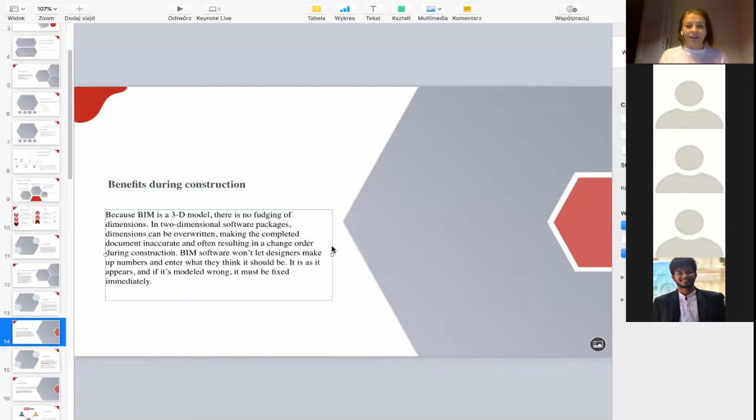From one side, it can sound like it takes more work, and we should focus very well on this 3D model, and it will take time. But mostly people are afraid in the beginning when they don't really know the software they are designing in, but later it's very easy, it's a very quick and fast way to design in this BIM idea, because everything is in 3D and we can really design nicely, and everything is connected with every specialist - construction, architects - and it's much faster to work like that.

And we can't really forget about this whole idea of BIM - it's something like working on the project. It's not finished with the end of our project.

This project made in BIM is very welcome to have something like that for managers of this building which we are designing, because when we just create some interior design for an apartment, and later, 5 years later, something breaks in the house, even the owner of the house can, in a very quick way, check: okay, this broke, I should find in this website, I should look for some replacement on this website, this manufacturer, this model of this element.

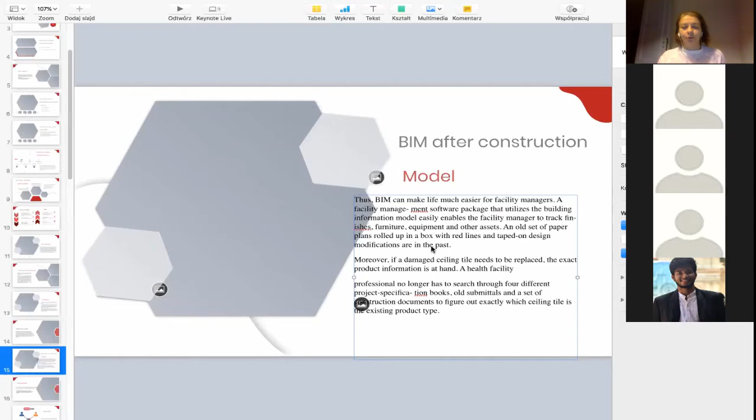When we are designing a hotel, it's absolutely amazing that we have such a project, because later the manager of this hotel can very quickly get all information: where and when we should make an appointment for our service, when we should check our lamps, or any other information in the project. Later it's very easy to make renovations or add services in the house, hotel, or restaurant we just designed.

The main term is IFC, and we should really do this because it's very important, since everybody is scared about software and afraid they won't be able to work. Everyone is working on AutoCAD, ArchiCAD, or Vectorworks, and we should work together, but we don't want to change our software.

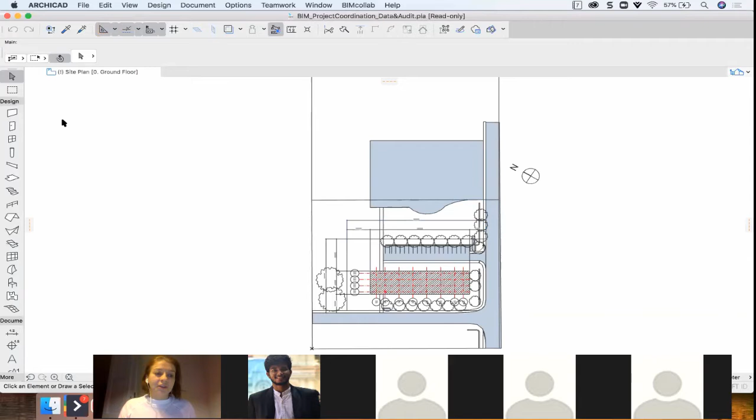We don't need to change our software. We can keep working in whatever we've been designing in until now, even in the future, because we are exchanging this as an ArchiCAD IFC model, and IFC can be exported from every kind of software we design in. This is very important, especially for interior designers, because we like to forget about this—we're just caring about our project and not thinking about anything else.

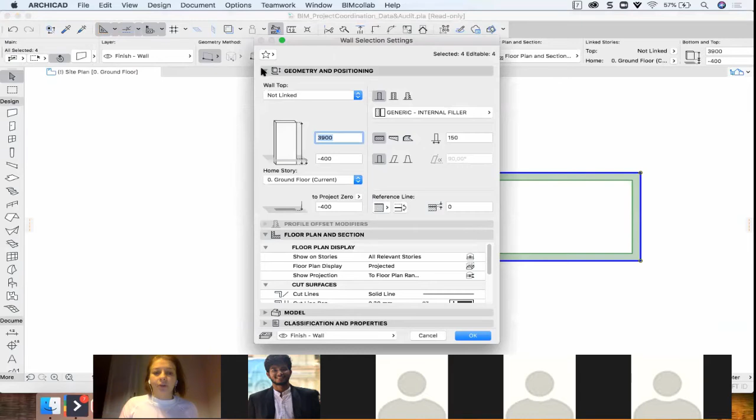When we place something in the program, no matter what it is, you always need to check if you're working on different software. For sure, you can check something like the information window of our project—there will be something like classification, and we need to properly set all this information for every element we put in our project, to set the right classification.

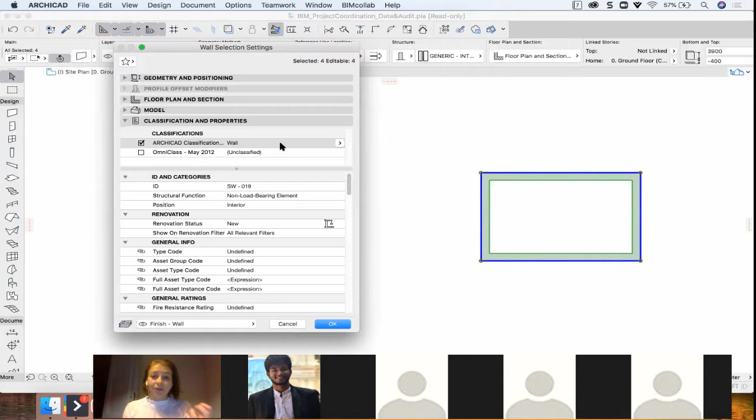So if it's a wall, I should set that it is a wall, not, say, a chair or something else. Because later, if the plumbing engineer tells us he needs to see where the walls are in this IFC model, and we don't click that tick in the file, don't select the wall, and don't set the classification, and we export such a model—the plumbing engineer will open this file and say, hello, but there are no walls. How am I supposed to work on this file? And this is the most important part.

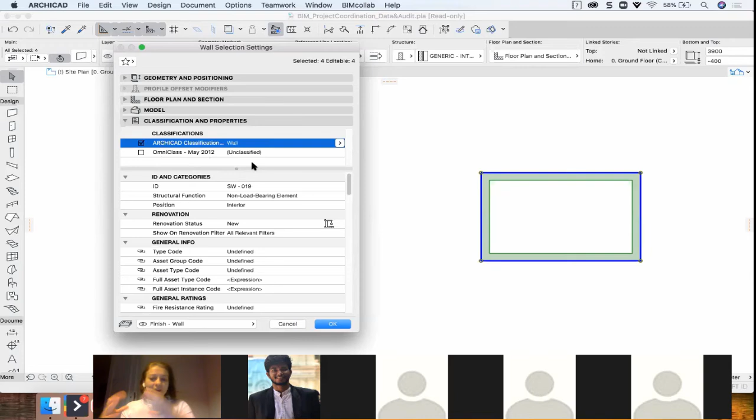I think if we know our software well, we can create a great interior design project, but we're not thinking that we need to collaborate. That's why it's so important that every element in your software has the right classification.

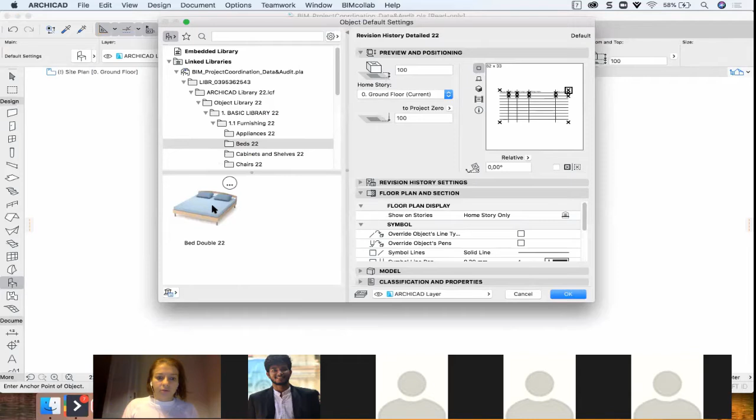We can also set properties—we can create many more properties. Here are some general ones in ArchiCAD, but we can set as many properties as we wish. For example, if I have some furniture, let's say a bed, I can set in the properties as much information as I wish.

You can see that it's not classification, but it doesn't need to be—our furniture doesn't need classification. It's nice if we set every element in our project with the right classification, but to be honest, our specialists—plumbing engineer, electrical engineer, and everyone else working with us on this project—don't really need to know where our beds are. It's not information for them.

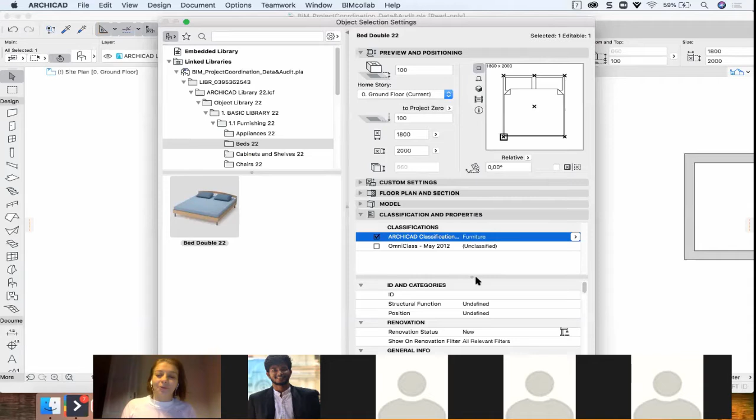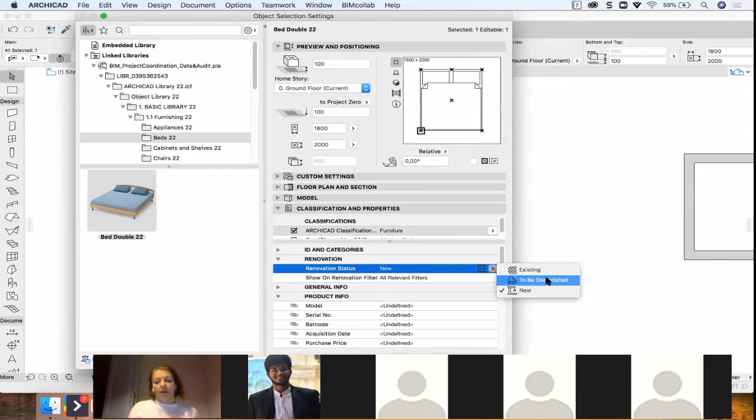It's quite important for the electrical engineer to know where the lamps should be, but it's nice that every element has the proper classification set in the right way. In ArchiCAD we also have something like renovation status, so we can set that this wall, okay, exists now, but for example we would like to place another wall, and this wall will be a new one.

IFC, right? How you can share the data and information from one software tool to another software tool, right?

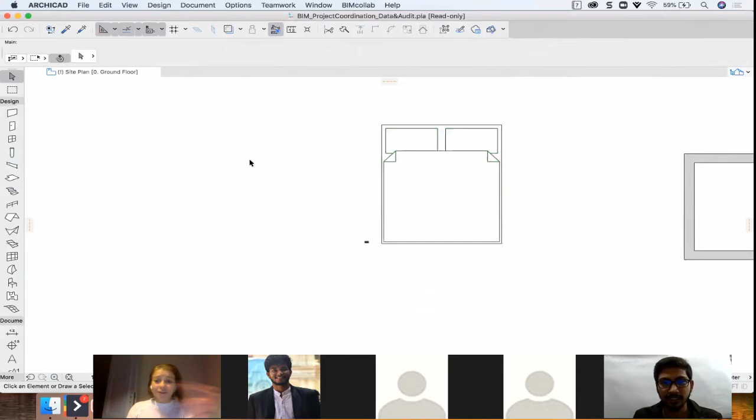So one more thing, because my screen is too small, I think. Okay, so when you set all this information, you just need to export—not save as, just go first, before you export, go to translators, IFC translators. But in ArchiCAD, when we're working with ArchiCAD classification, we don't really need to go here, because it's already proper—something like a wall from ArchiCAD will be exported as a wall, it will be exported like this. So when we save such a file later, save as IFC. Absolutely.

This IFC file, the plumbing or electric engineer, we import to his project or some extra software. He can see this model, but he can't really make any change in this file. This is quite important, because sometimes we get some file he updated, and there are some mistakes - the plumbing engineer moved it on our plan, but it didn't move on his project.

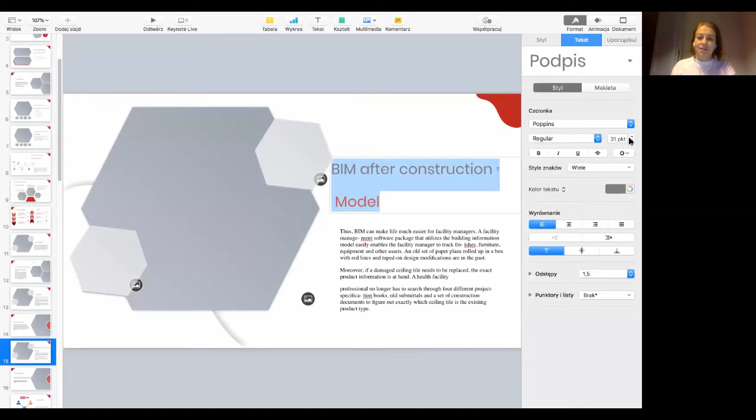But mostly people are afraid in the beginning when they don't really know the software well where they are designing. Later it's very easy, very quick, very fast - we can design in this BIM idea, because everything is in 3D and we can really design nicely, and everything is connected with every specialist, construction, architects, and it's much more faster to work like that.

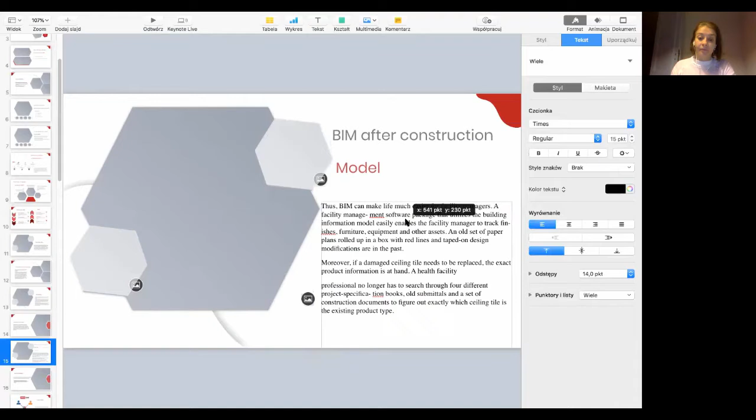And we can't really forget about this whole idea of BIM.

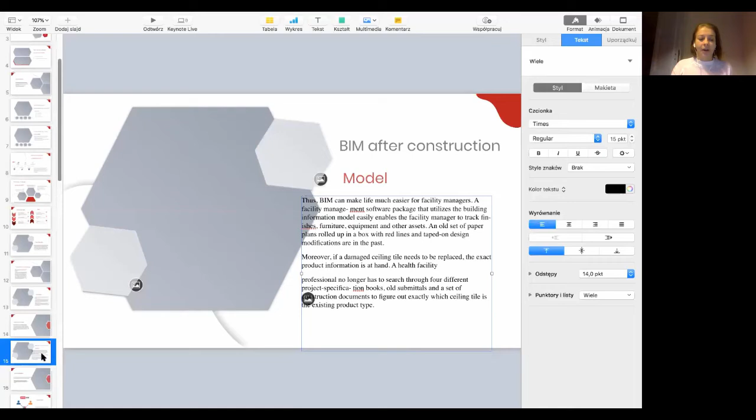Time is running, I could talk and talk about this. This is why IFC is so important, because everybody is scared about software, that they will not be able to work.

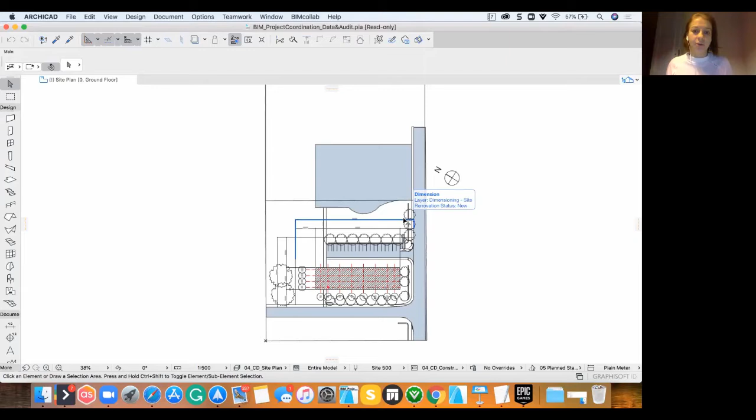I will just share my screen. Everyone is afraid because if you're working on AutoCAD, ArchiCAD, or Vectorworks, you think we should work together but don't want to change our software. We don't need to change our software. We can keep designing with what we use now, even in the future, because we are exchanging this as an ArchiCAD IFC model, and IFC can be exported from every kind of software we design with.

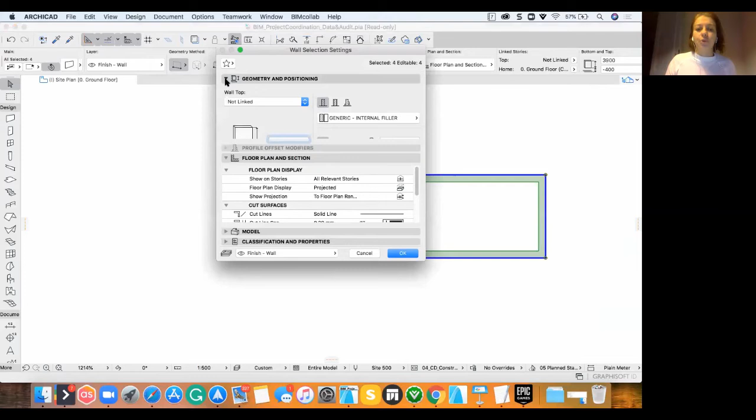This is very important, especially for interior designers, because we like to forget about this. We just care about our project and don't think about anything else. But no matter what you place in the program, you need to check things if you are working on different software. You can check something like the window of information of our project.

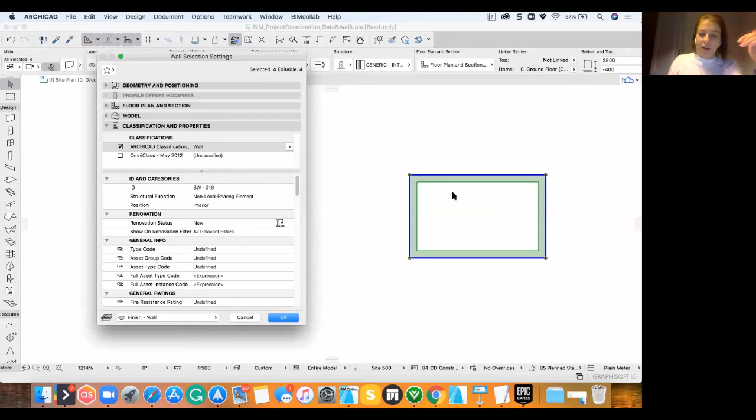There will be something like classification, and we need to properly set this information for every element we put in our project, to set the right classification. So if it's a wall, I should set that it is a wall, not something else. Because later, if the plumbing engineer tells us he needs to see where the walls are in this IFC model, and we haven't clicked that tick in the file, haven't selected the wall and set the classification, when we export such a model the plumbing engineer will open the file and say hello, there are no walls here, how am I supposed to work on this file?

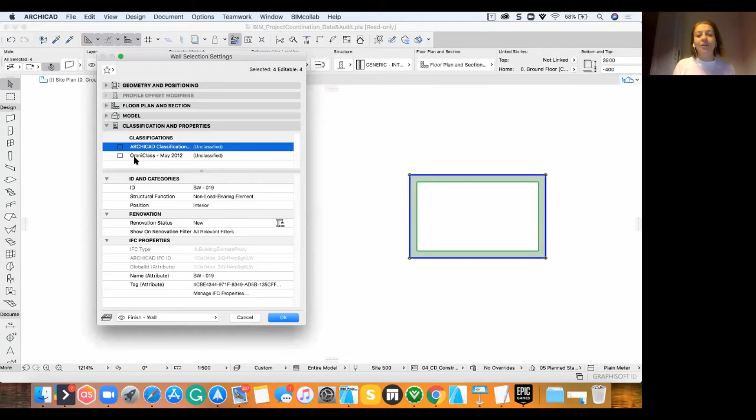This is the most important thing. I think if we know our software well, we can create a great interior design project, but we're not thinking that we need to collaborate. That's why it's so important that every element in your software has the right classification.

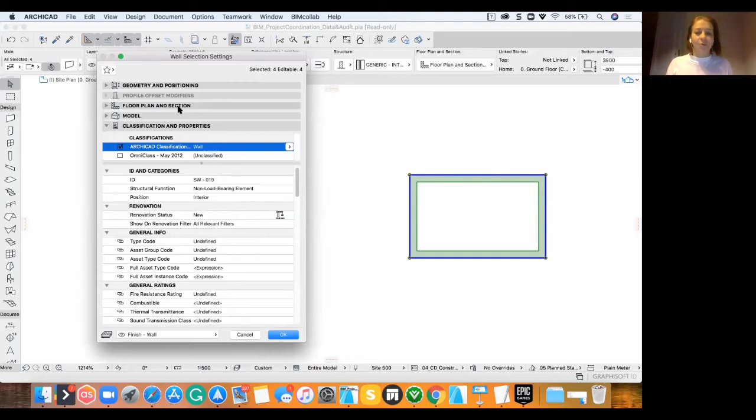We can also set properties, and create as many properties as we wish. Here are some general ones in ArchiCAD, but we can set as many properties as we want. For example, if I have some furniture, let's say a bed, I can set in the properties as much information as I wish. You can see this isn't classification, but it doesn't need to be. Our furniture doesn't need classification.

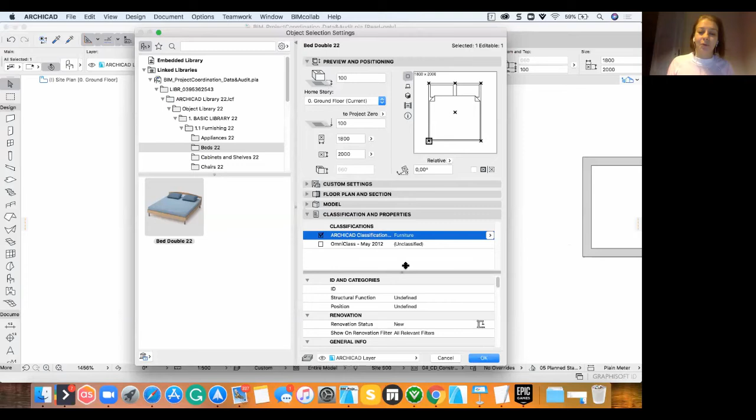It's nice if we set every element in our project with the right classification, but to be honest, our specialists, the plumbing engineer, electrician, and everybody working with us on this project, don't really need to know where our beds are in the project. That's not information for them. It's quite important for the electrical engineer to know where the lamps should be, but it's nice to have every element with proper classification set in the right way.

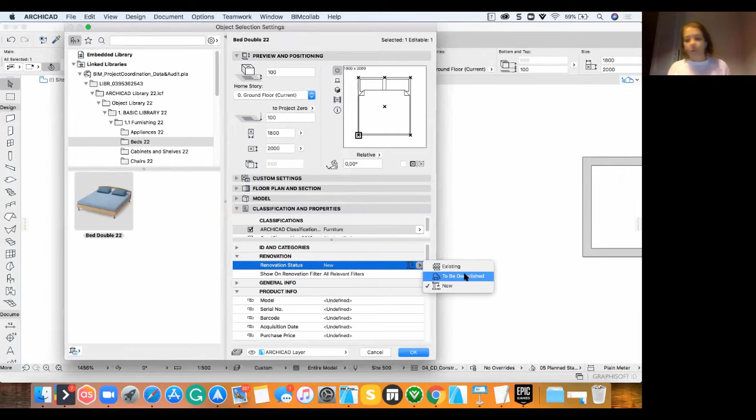In ArchiCAD we also have something like renovation, where we can set that this wall exists now, but for example we'd like to place another wall, and this wall will be new. Yeah, I'm almost finished, I think.

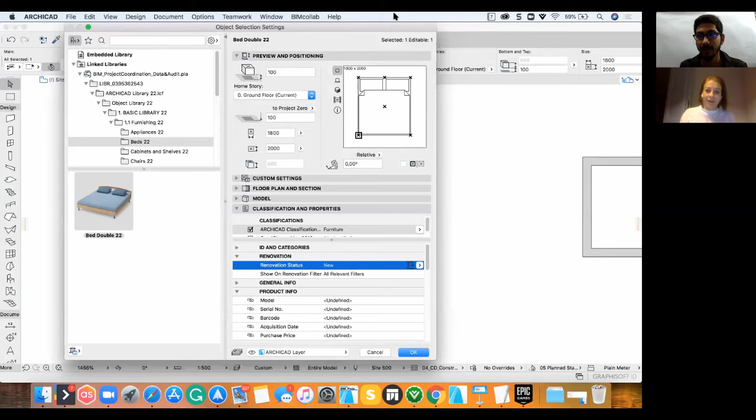IFC, right? How you can share the data and the information from one software tool to another software tool. When you set this all information, you just need to export, not save as.

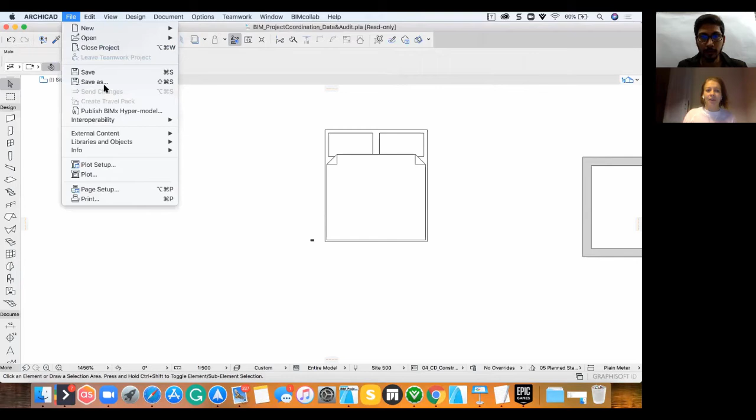Go before you export, to translators, IFC translators. But if in ArchiCAD we are working with the ArchiCAD classification, we don't really need to go here because everything is done in a proper way, so something like wall from ArchiCAD will be exported as wall. So when we save such file later, save as IFC, and it can be exported to any of the tools.

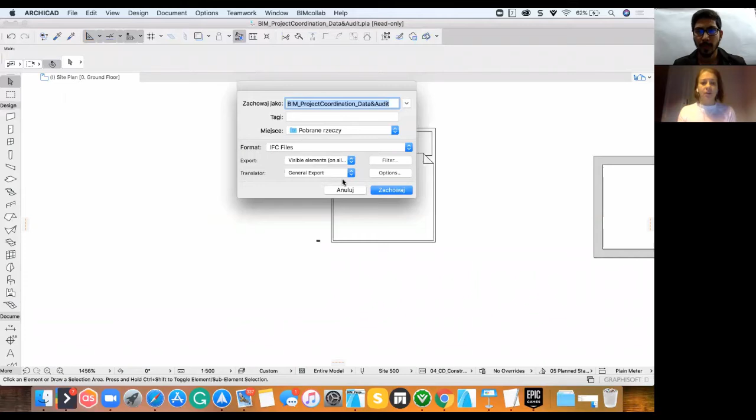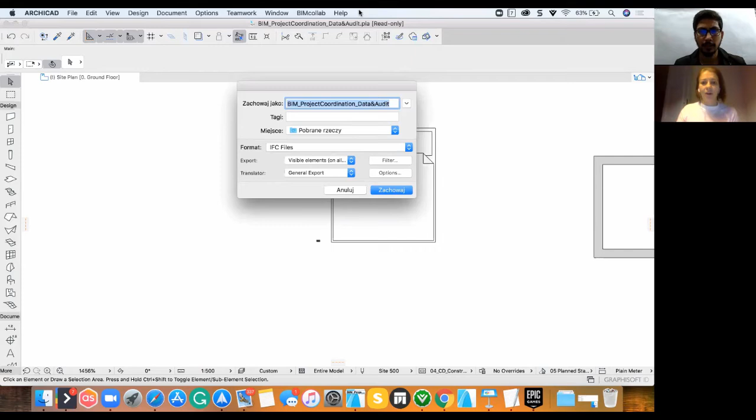So here we finished, we save this file. This is what I said, for example we get some project from architect, this full model where the exterior walls, roof, slabs, this information we need to start our interior design project. But there are some interior walls inside, and if we would like to demolish one of them, we can't. We need to send information to the architect that we would like to demolish this wall. He needs to do this in his model and send us the file again. So we can open the IFC file, but we can't make any changes in it. I think this is quite important.

I have a question for you, Beata. Like most people in the West, in the European countries, they are using and adopting ArchiCAD, right? It's Revit. I think Revit is even more popular than ArchiCAD. SketchUp for interior design, I'm telling you how interior design is, SketchUp is quite popular for interior designers as well.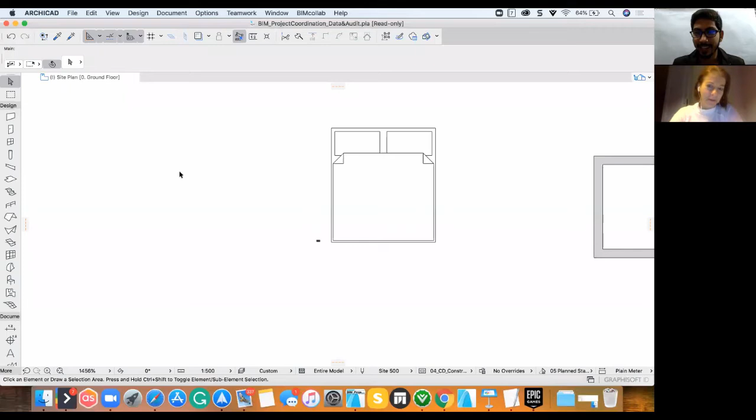And SketchUp also works in the BIM process, because not everybody knows it's BIM ready. So if we talk about SketchUp and ArchiCAD, ArchiCAD stores the information, whereas SketchUp doesn't store the information, right? So how can it be involved in the BIM workflows? I don't know SketchUp well, but if they are BIM ready, all elements should also have some information. SketchUp works a little differently because in ArchiCAD we work with real walls, doors, objects, lamps etc. But in SketchUp we just work with something like a morph. But for sure if they're BIM ready, they should know how to make this classification, because it's everything about classification, that we need to set.

So how do we collaborate with different stakeholders? Like from Autodesk we have BIM 360 for cloud collaboration. Do we have any such platform with ArchiCAD as well? Yes, there is, for example, let me just click it. BIMcollab, for example, it's something open where we can just share and work together on the project.

But this is when we are from different disciplines, we can't have one software when we are collaborating. And BIMcollab, as I know, is free up to 5 users, if I remember right.

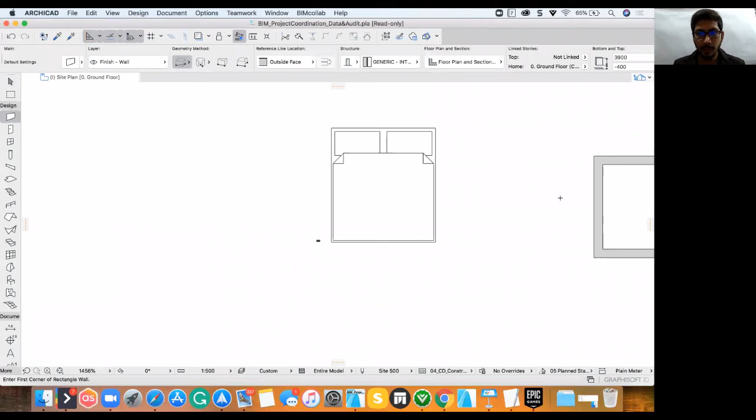Finish into the wall, right. For example, we have some wall here, and we have an option in the model when we are creating it, where we decide what kind of finish this wall should have. Mostly we are doing something in this way.

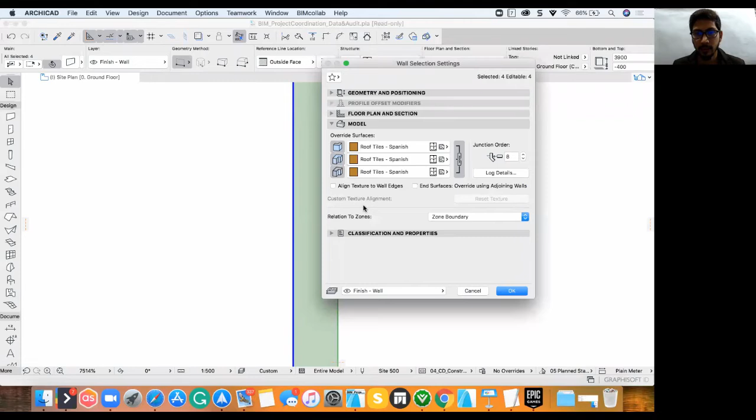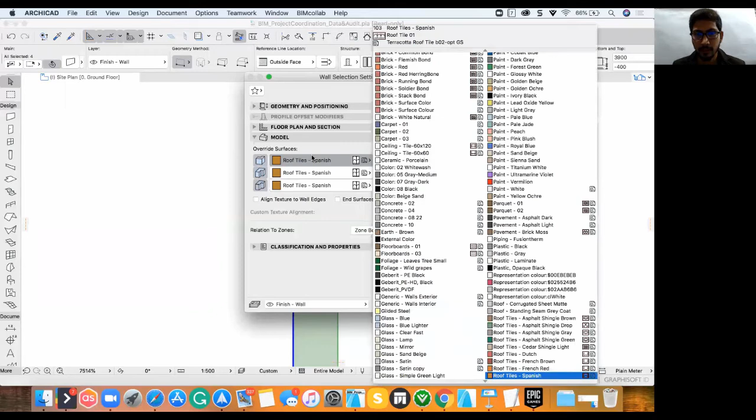There was a specific question about glass or a fabric panel. First you set it in the model, for example if it's the wall, it will be in the model. But if you would like to place something new, at the beginning you need to create this material in the software, and it will be available here.

So if we have some glass, for example there are some glasses in this project, even more glasses. But if you haven't such glass now, you need to go to options, elements, attributes, surfaces, and create this material there. If you create this material here, it will be available later in this model.

Yeah, I think she has answered your question. So Beata, can you tell me, when we talk about taking out the material quantity, is it also possible to take out the material quantities from ArchiCAD directly?

Material quantity from the ArchiCAD directly? I'm sorry, I don't understand your question. Yeah, I think he also has the same question. That person needs to quantify the number of glass panels on a wall. Is it possible?

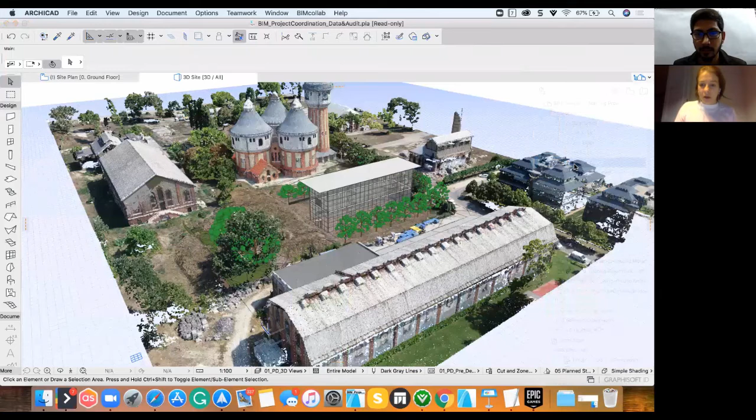I'm trying to imagine in what way we would like to set this glass. But should the glass be on all the wall or just on one element? On one element, on one side or one face of the wall.

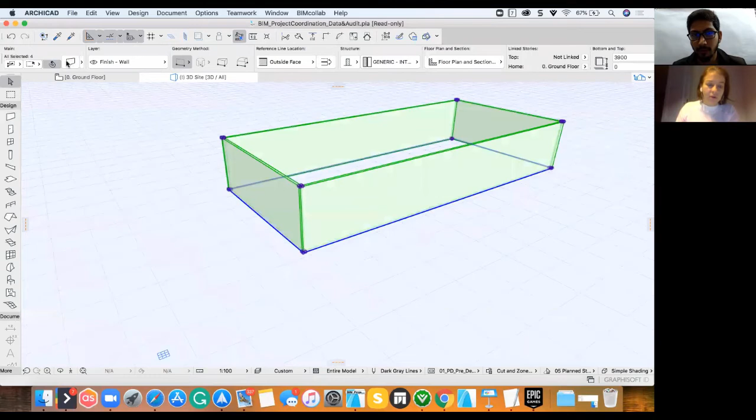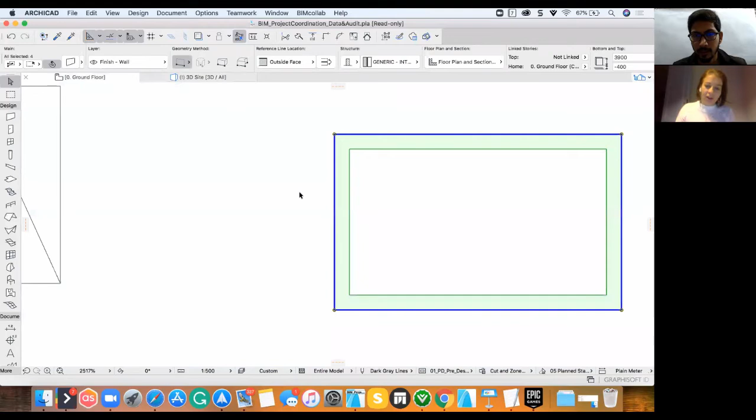It's more difficult if you would like to have, say, 2 meters of glass and later it will be white. If you set something like that, it's more difficult because a wall is always full wall. Before creating something, it would be wasting of time if we create 5 meters glass and later different materials. I have 2 pieces of wall and I can set the glass on one piece, but it's wasting of time because especially at the beginning you can change your mind about what kind of surfaces it can be.

ArchiCAD has a tool called split. We just select this wall, click on split, and you can cut this wall wherever you would like. Now from one wall I can have 2 pieces of wall, and I can change the materials of one for something else, and another we have something else.

There are also options to really know exactly where to split, where to cut this wall, in which dimension, what elements. We need to set the palette, control box.

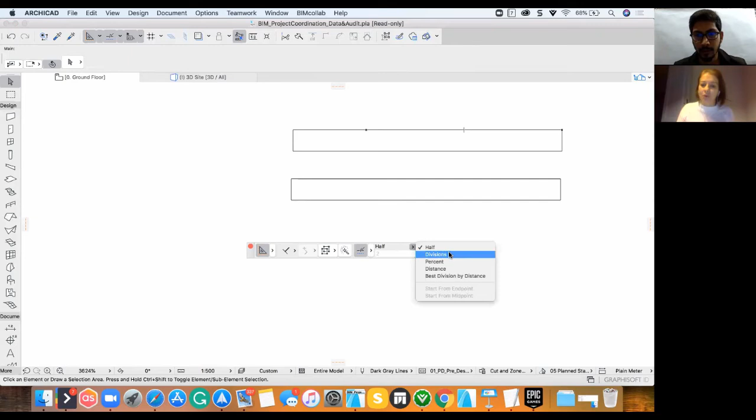Wait, here is something like a special point. Wherever you are going, you can see a short line - that's the special point. We can set, for example, that the special point should be exactly where I would like to cut the wall and make 1 meter this material, 1 meter this, 1 meter this, so 1000 millimeters.

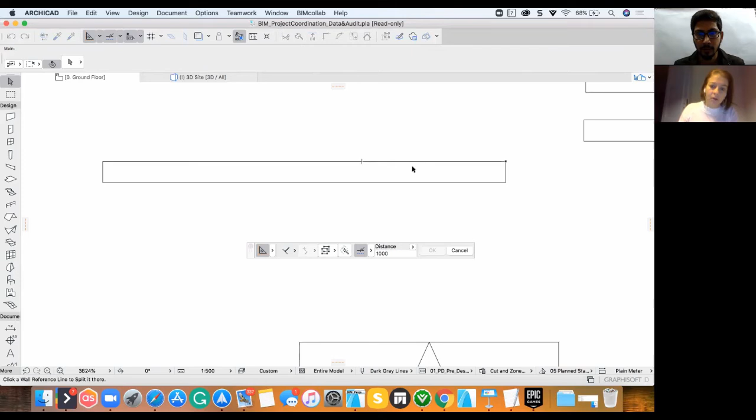So let's set some wall. Now I'm just taking this, you can see I have a line here and one line here. Click on this point and I have 2 elements. Again, split. Click on this point and we have 3 different sections, exactly 1 meter, 1 meter. This one will be a little bit short, but I start cutting from this direction, 1 meter, 1 meter. On the plan it looks correct, it's one wall, but I can select and change materials to something different.

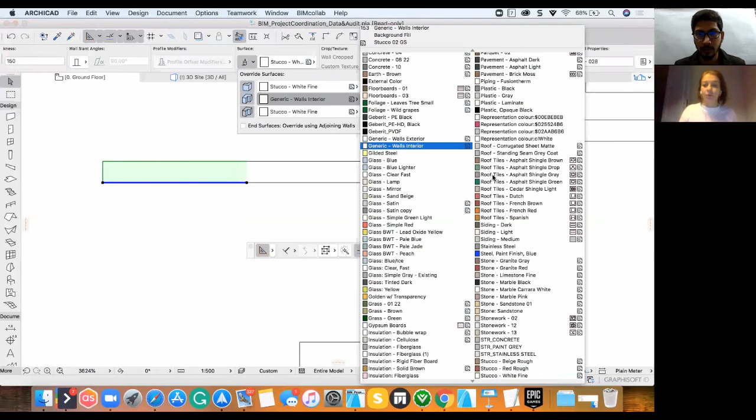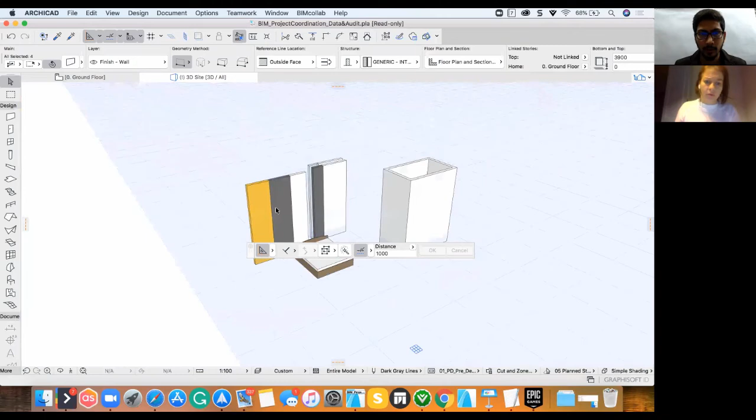Not here. Here, something like, it's in this way. Right. The problem is that the split doesn't work in this direction - you can't really place materials like that horizontally.

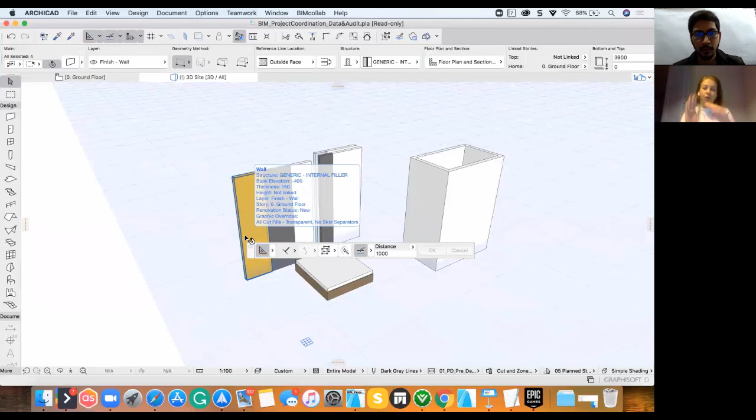So you need to set a wall on the wall, or place some small wall or morph on this wall in the right direction. Got it.

Can you also show some of your projects which you have, Beata? I think it's a point cloud model, right? Yes, you can also import if you have one.

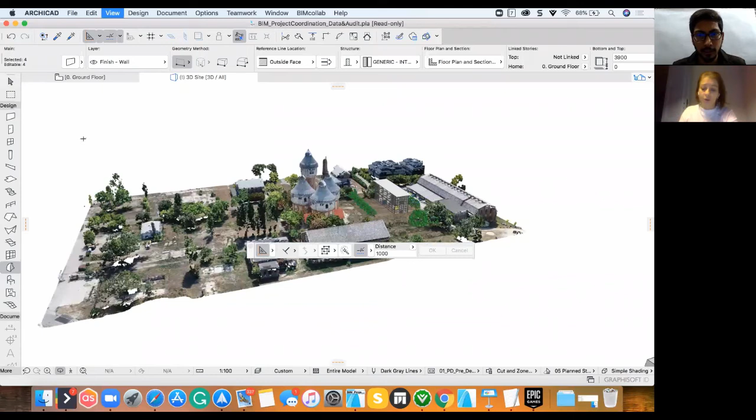It's more popular, maybe not so much popular yet, but it started to be popular to make point cloud. You can also make interior point cloud and import this. ArchiCAD itself imports point cloud.

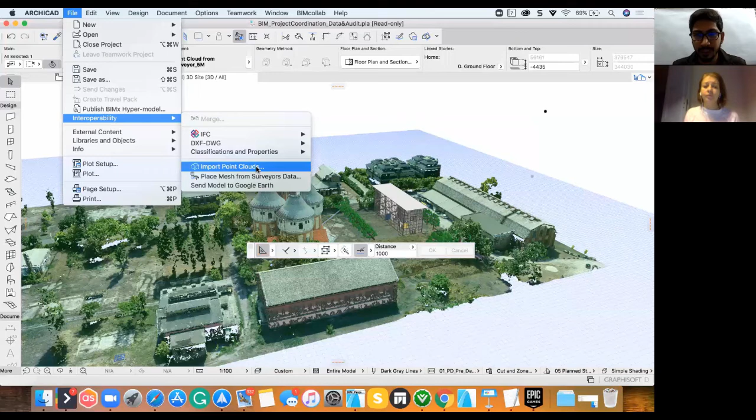Can you show us some of your projects which you have done using ArchiCAD, Artlantis, or Cinema 4D - a glimpse of it, or even show your website if you have uploaded it there directly?

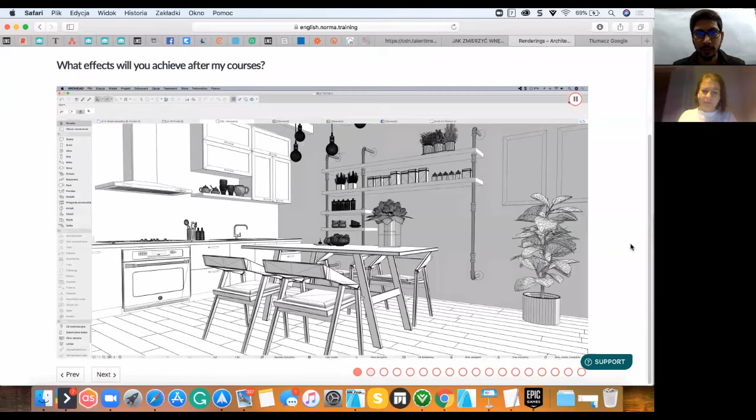This is renderings made too fast, only in ArchiCAD. So I think even if you are not using some extra software, you can make something nice looking pictures.

I think I can just go to Norma training and you can slowly check what kind of effects you can make in ArchiCAD.

Previously I read news stating that ArchiCAD also has a feature where you can define which BIM standard you want to use. Is it right? Or yes, which country you want to use. Can you just show it, like how is it?

You mean BIM standards? Different countries have their own different standards, right? So different ArchiCAD standards are more about that. In the United Kingdom, they push for specific layer styles, line weights, or naming conventions, already predefined according to a specific country. So these are the standards which different countries adopt.

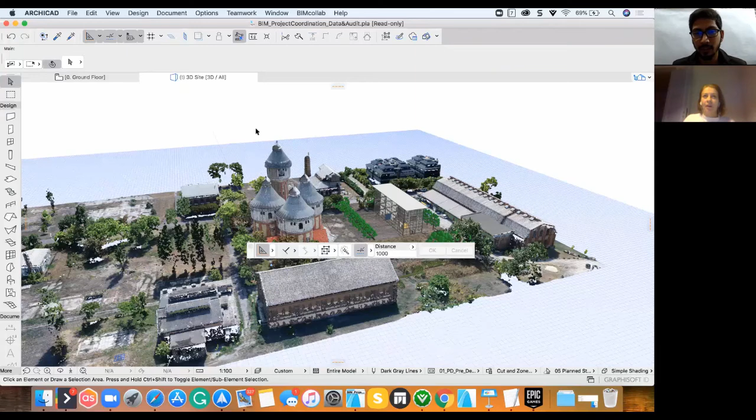So I read an article a few months back about ArchiCAD, that it has incorporated BIM standards within its workflow. Have you used it?

But ArchiCAD is something like software, it's not really about BIM standards. What about BIM? It's more about how we are working on this project.

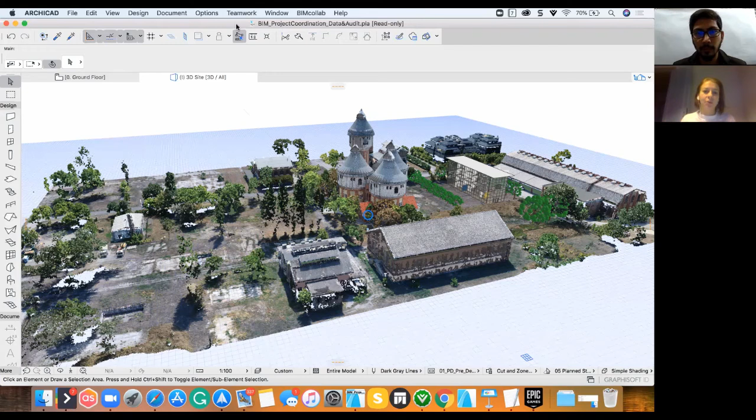This is what we are designing in ArchiCAD. We can set whatever classification we would like, and that's why we can export this. We have all this classification, and with the new version it's even better, because it's 22, now it's 23, and it's even more focused on this classification.

For example, when I have some wall, I can have two different classifications - ArchiCAD classification, but also OmniClass - and we can import such classification into ArchiCAD and use this extra classification. But we need to set this at the beginning of our project with the people we are working with, our customer, to decide in which classification we'll be working. Later you will really know what classification you can set here, and you can also set all classification like this.

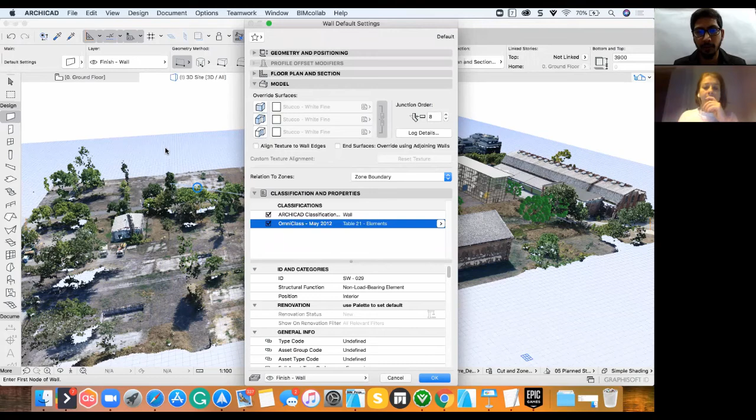When we do the modeling in ArchiCAD, is there also a feature for automated modeling, or is there any automation happening with ArchiCAD?

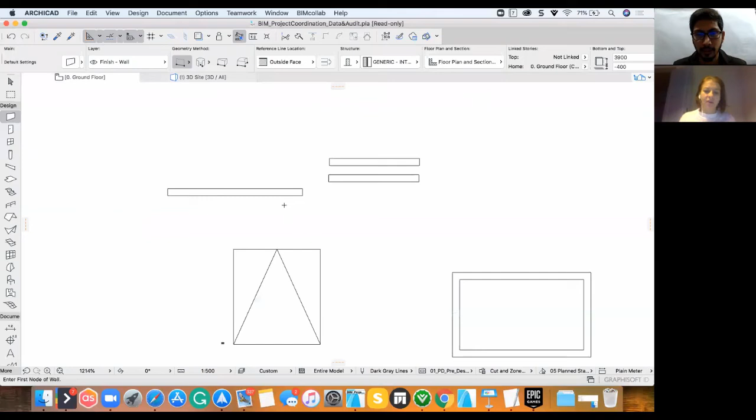When we are modeling, mostly when creating ArchiCAD projects, we are working on 2D. Everything we set on 2D is better, it's clearer, you can set all dimensions, everything - it's much cleaner than working in 3D. But anything we set on this plan is available in 3D.

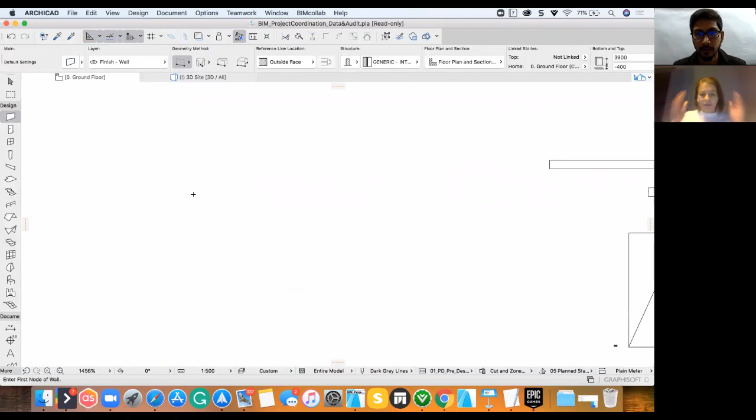And on the elevation, interior elevation - the way of working in ArchiCAD is to just focus on the plan, make as many details as clear as possible, and everything else will be automatically created. The 3D is already there - you don't need to create separate 3D and separate 2D. Even elevation, interior elevation, anything, it's already there.

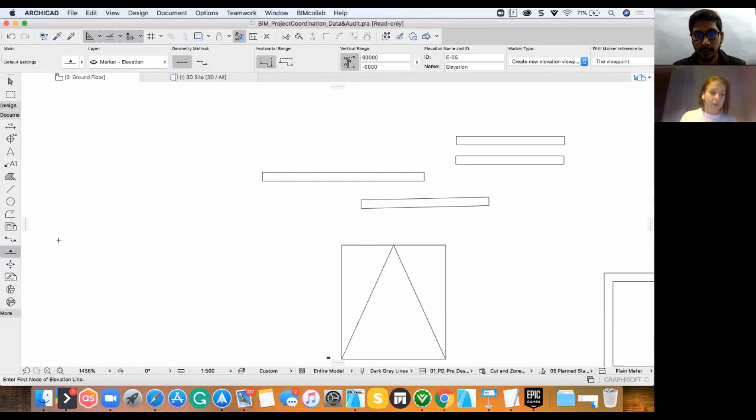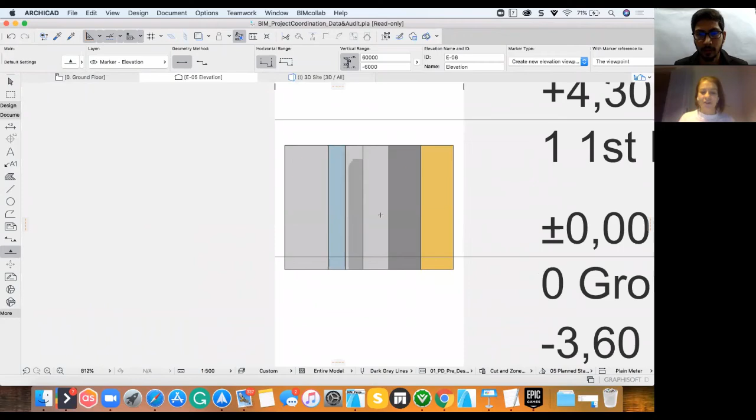For example, we create some elevation here, let me just open it. I don't need to create this elevation because it will already be here - it's those colors which we just set. Of course, the fonts need to change, or the color, because it's at 1 to 500 scale now. If I change this color, it will look better.

So just focus on the plan and the rest will be almost ready. Everything we need to do is just some correction or placing some extra dimensions here or there, but you don't need to create everything one more time in every single window.

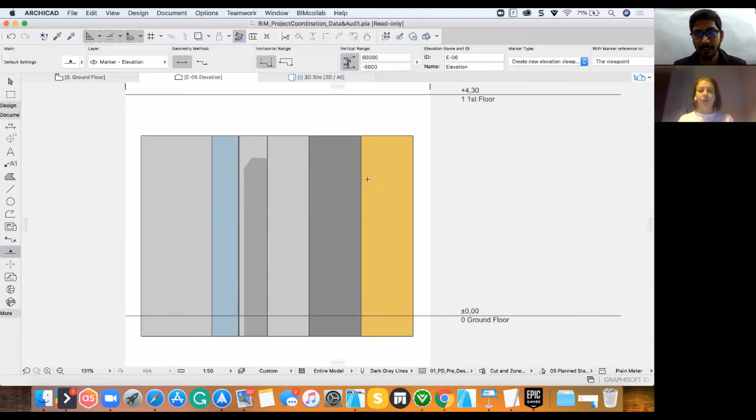Many people have asked a lot of questions for your session, but I'll narrow it down to one question most people are asking. Suppose, as an example, I'm an early stage adopter of BIM and a student, and I want to move into the BIM environment and workflows with ArchiCAD - what could be the pathway for learning as a student or as a fresher? How should we start or move towards learning BIM and ArchiCAD?

For sure, as I know, Graphisoft, the owner of ArchiCAD, has free courses on their website, which would be welcome to join. They show you everything, how to create the walls and everything.

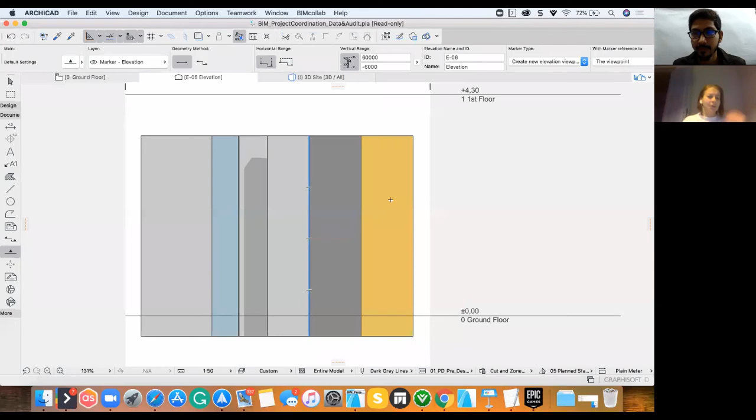There's not so many focusing on this. If you know how to create the project in ArchiCAD in proper way, it will be walls, not some lines - you are working in 3D, not 2D, and you have already a proper project created in the proper way. Later it's just more advanced knowledge.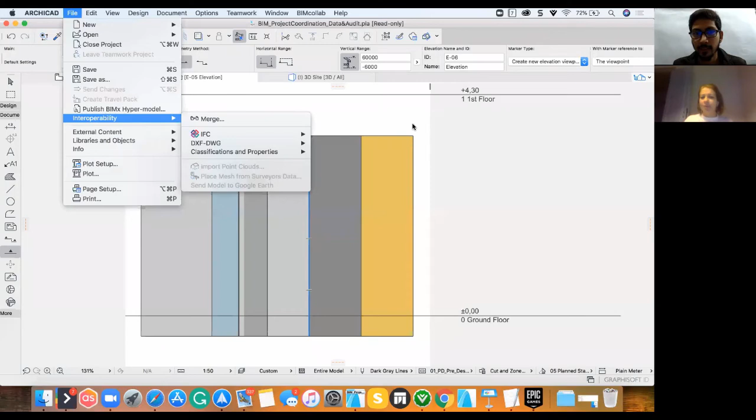This is about IFC, how to exchange the model with others and how to set everything up. But if somebody is just starting with ArchiCAD, it will be nice to just go to the website. There is something called Learning, and there are a few courses showing from the beginning to the end how to set this up and make the model of the house in ArchiCAD. You can download some sample models, sample projects, where you can check how it really looks, how the plans work, what kind of information is set in every element. I think it's nice to download such a project.

Yeah, the resources and the courses are totally free available on the Graphisoft website. Anyone can download it and they can also get the educational version of ArchiCAD, and it's one year long - you can use it and renew after one year to the new version. And as long as you are a student, you have the full education version for free, so you can also use that.

Actually, almost one year back, I downloaded the entire educational version of ArchiCAD software. I downloaded all the tutorials and started watching and trying to learn the ArchiCAD tool. But later I found it's somewhat difficult for me to switch from Revit to ArchiCAD.

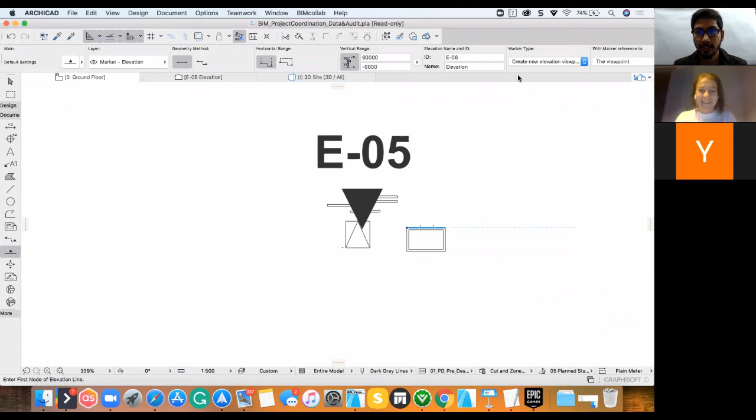So I was watching your presentation and I found that you are also using VR for presenting the views to your client. So what kind of software are you using for VR? Two, actually: Artlantis and Twinmotion.

I'm trying to make renderings in ArchiCAD - what I showed on the website was direct from ArchiCAD. So if I don't need to create something extra like an animation in VR, I try not to go out from ArchiCAD. But sometimes I use Artlantis or Twinmotion. Twinmotion is, I think, much better for exterior because there is something like water and it's nice to see when you are watching the house, and also nice for interiors.

Are you also doing your work in AR, augmented reality? Working in Artlantis, you can make something like a panorama or animation. Animation is just watching a movie, but with panorama you can set some points and users can jump from this point to this point - yes, it's possible in Artlantis.